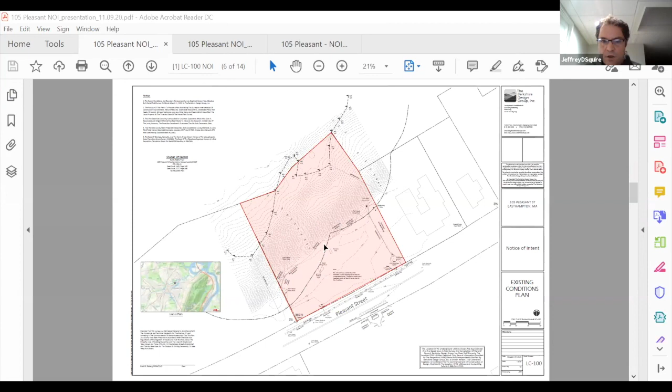again, just zooming in on the site, the upper portion of the site, you can really see the developed portion is all the level portion up here. The site drops off fairly precipitously to the back, to the edge of the bordering vegetated wetland in the back of the site. The extent of what used to be there really does follow the top of the hill.

The proposal is to redevelop the site with roughly a 3,700 square foot single story billiards hall. So that would occupy the western portion of the site. The eastern portion of the site, we've got a small parking lot. There's a stormwater system. We have a rain garden out in front, some other landscape elements.

Sidewalks. There's the rear deck that would be cantilevered slightly over that slope, but really the remainder of the site would remain untouched. We do have a single stormwater outlet in the buffer zone associated with a parking lot discharge, but we have a level spreader and a single 10-inch pipe that does go down the hill to discharge that system there. But the remainder of the site to the north will remain undisturbed, and much in its current condition.

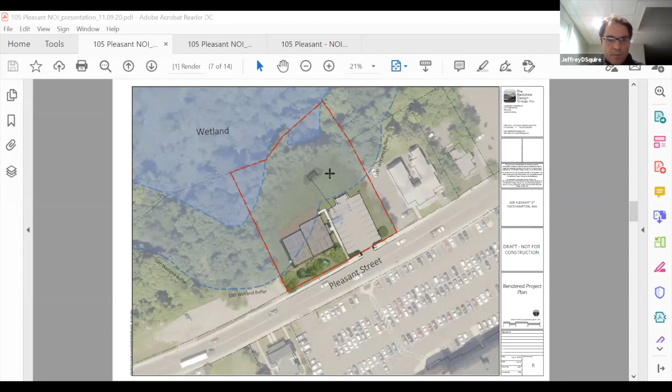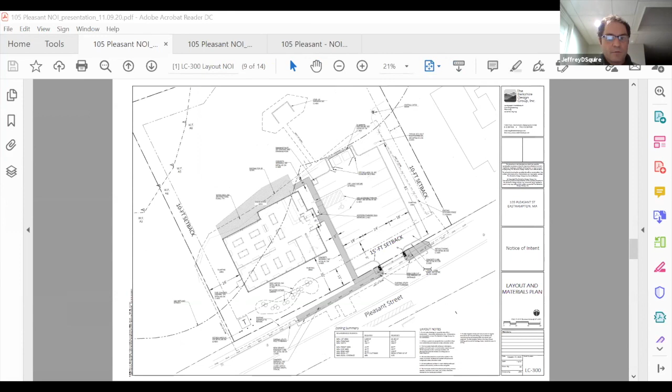Again, just walking through the plan set, we have a site demolition and erosion control plan showing how we intend to both construct the site, prevent sediment and erosion during construction, and then following construction. Basic layout plans showing the site, stormwater drainage plans. Again, we've got a rain garden out front to capture what we can out in front.

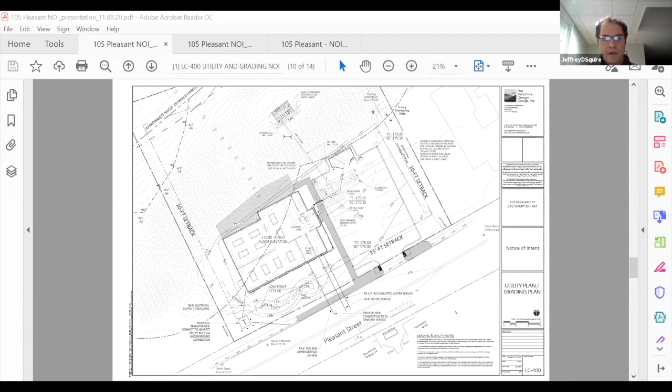There's a small infiltration system in the northern part of the parking lot. Again, with an overflow, there's a treatment chamber in the corner with a 10-inch stormwater discharge down the slope to this little bit of a level area, this little terrace in that slope that we're taking advantage of, so we don't need to cut all the way down the slope in the back for the discharge.

Planting plan, again, rain garden details. And I think the remainder of the set is just largely construction details. Stormwater system, treatment chamber. I can go through some of the comments from DEP or answer any questions that anybody has right now, if there are any. I don't know the best way to.

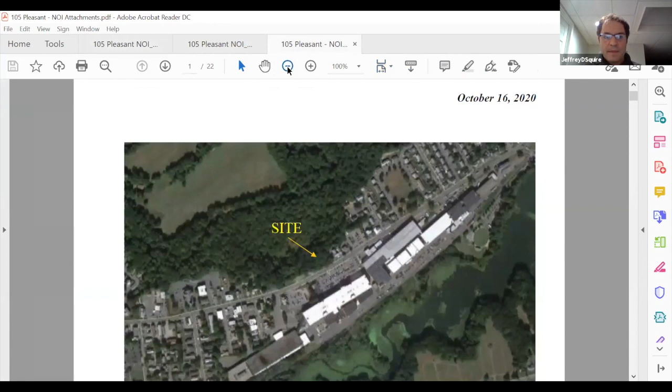So why don't you start by reviewing DEP's comments, and then we can open it up to further comments and discussion from the commission. Sure. Okay, great. So yeah, in response to the comments that we received from DEP, first one was about the underground stormwater chambers are subject to the underground injection program. We understand that. It's paperwork that we will fill out when the project is ready to be constructed in compliance with that requirement.

Stormwater zone 2, the public water supply discharge, stormwater standard 6. We did acknowledge this. At least our understanding is that specific treatment chamber, I believe I have some documentation as to how it meets the standards for that particular requirement. But again, we can review that in further detail if there's other questions. I do have some documentation in the back of this to help support that.

Illicit discharge compliance. Yes, we understand that. There was a statement of compliance in the stormwater report. I'll highlight that shortly. Manufacturer's data for the treatment chamber, again, that is provided further down in these documents, along with this comment regarding the zone 2.

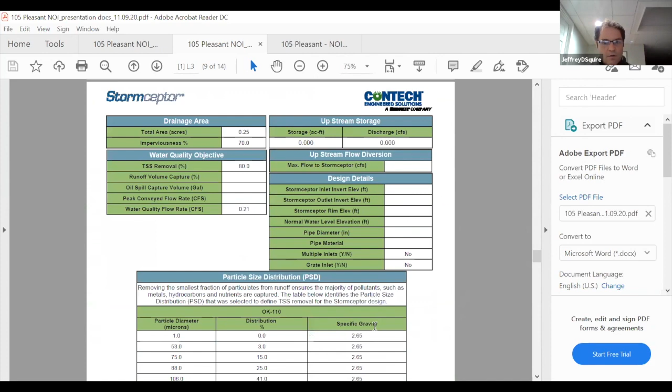The Stormceptor: this is all of the calculations and information from the manufacturer regarding the compliance with the stormwater regulations. I'm not the civil engineer, so I can't answer all the specifics of these, but we can provide this to the commission, and it provides a lot of the information that was, at least to my understanding, requested in those comments.

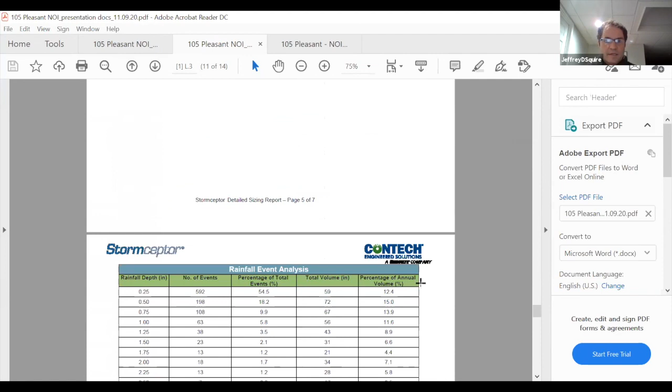And lastly, again, understanding the requirements of the guidelines for the level spreader. We did design the spreader in compliance with the Mass Highway design guidelines, which set a standard of 1.5 feet per second for velocity discharge, and we're below 1 in the 100-year storm. So we did review those guidelines. So yeah, real quickly, that's what I've got. I'm happy to answer any other questions.

Okay. Cassie, has the city engineer received a copy of the stormwater report, and have they offered any feedback on this? I haven't gotten any feedback from the city engineer yet. I don't know if that will be part of the planning board review as well, but I can definitely send that along and get his review. Okay, I'd like to verify that in particular. Mm-hmm.

All right, does anyone want to have any comments to start, or shall I start with mine? Rock, paper, scissors. All right then.

What is drainage on the site currently, just so we can understand? Does it go out to the street or just run off the back of the lot, or how does that work? It's a good question. I think there is a partial curb still at the back of the site. Looking at the topography, it really is generally pretty flat up there with a couple of small, isolated low spots, but we didn't pick up any catch basins. So I suspect there's a portion of the site that runs directly to Pleasant Street.

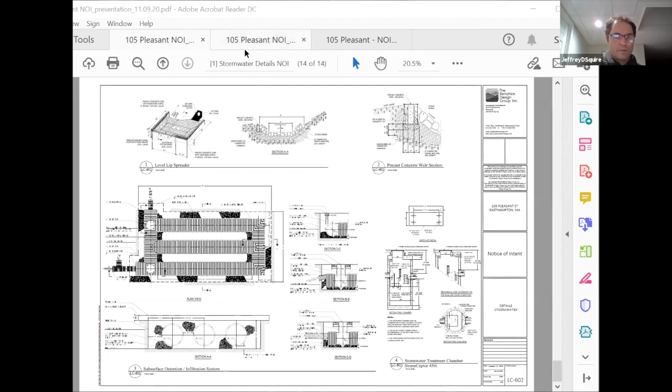So then they're going to excavate out how large an area? It's what, 10 by 10? 15 by 10? And how are they going to load all that soil out? Are they going to schlep it up the slope in buckets? Well, we'll need to work with a contractor to understand how they'll do that. Yeah, I imagine they'll have to pull it out somehow. Yeah, they're not going to be able to leave it there, obviously. Right.

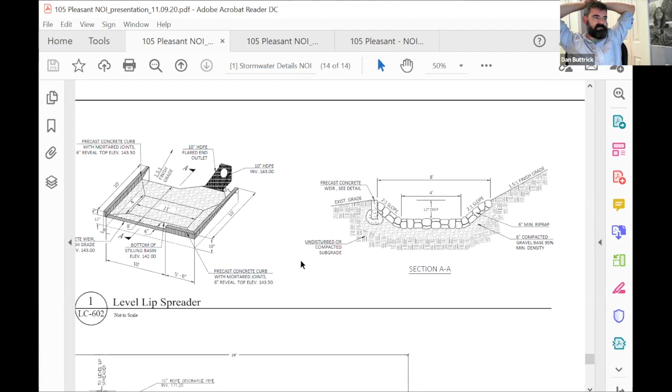I guess I'm thinking, moving towards an order of conditions, we could have some kind of condition to have more detail provided once a contractor is selected and construction started as to what kind of, if any, access improvements are needed. But the permit wouldn't cover that. So we'd have to address that after the fact if their footprint of work is going to be bigger than what we approve. That's where I'm thinking. I'm just looking at the slope. I feel like half the work is going to be very challenging. Yeah. Okay.

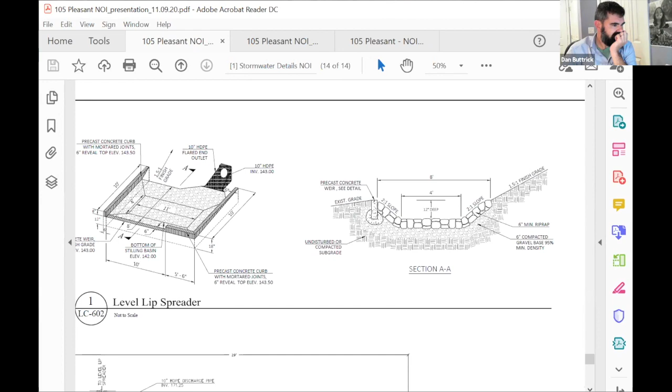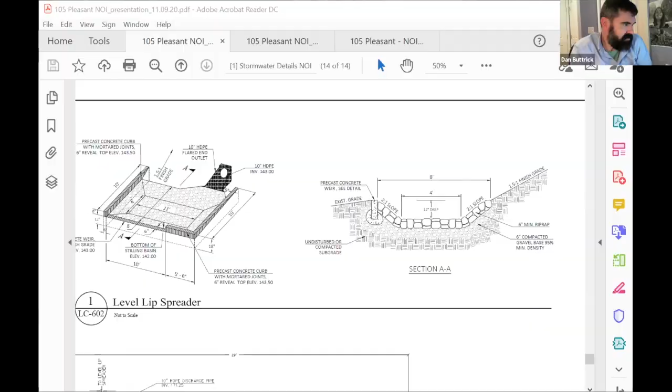So looking at this, where does the pipe come into the level spreader? It doesn't show in that section. Well, in section AA it doesn't show. It's shown in the ISO drawing, but it would come in roughly through this embankment here. I'm no longer seeing the plans. Oh, I'm sorry. Did I stop sharing? I'm following along in the version on the OneDrive. So yeah, it would come in right through here somewhere, if people can see that. So then on the down gradient side is the precast concrete weir. Yes, correct. So they're going to.

So can you go over the detail of that? Sure. Yeah, so it's surrounded with precast concrete to help contain everything and define it and provide that level lip that you're really trying to achieve with the spreader. There's a notch in it to allow the lower flows at this elevation, but the inside is really intended to dissipate and spread that water out, obviously.

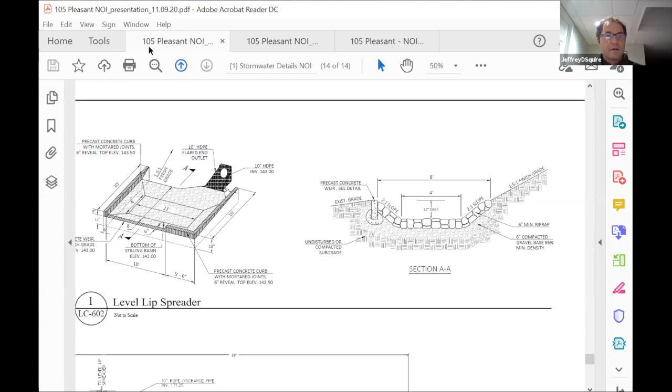Okay. So, are there any? I didn't notice any, and it could just be that I didn't take a good look. Are there any details on the restoration of the slope? Not specifically. Like I said, the slope itself right now really doesn't have much there aside from a handful of trees. So there's nothing specific in the plans that speaks to what that would be revegetated with. But you made reference to some sort of erosion control blanket, I believe. I would imagine they would need to put down some sort of erosion control blanket once they fill that trench. Yes.

And we're not dealing with riverfront area here, right? We're just in 100-foot buffer zone. This is just buffer zone, correct? Jeff, I don't know how other members of the commission feel about this, so I'm seeking their input too. But I think given the steepness of that slope, I would like to see a detail added regarding the restoration of the surface with an erosion control blanket and what native seed mix would be proposed. Mm-hmm.

Yeah, I think that makes sense. I think it's just too long a run and too steep a slope to leave to question. Mm-hmm. What is the change in impervious area compared to existing conditions? That is a good question. I know it's a reduction. I don't know how much of a reduction though. It's a reduction in impervious area? It is. Yeah, let me show you.

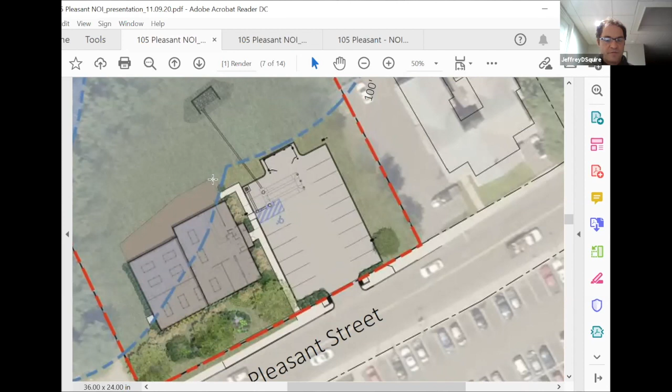Yeah, if you look at the existing site. So the existing site basically has asphalt below this upper portion from essentially this corner. You can see it wraps around here. You can see the edge of the guardrail. There's old curbing on this back edge here that wraps around and used to tie in evidently to the gravel lot next door. That's what's there now. And so we're providing some green space on the eastern portion of the site out in front of the building, and then again on the west side. And the top of slope is roughly right here. Mm-hmm.

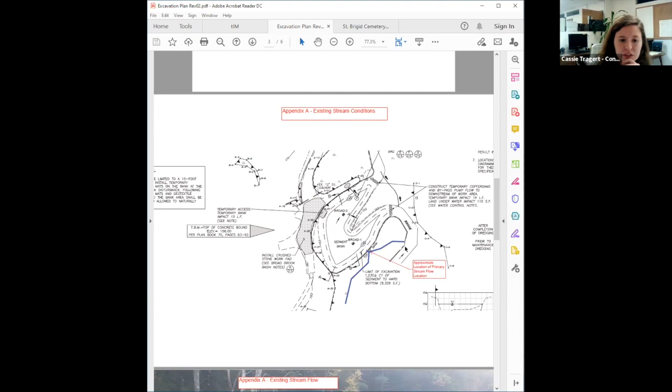Do we have a picture here that shows the original plan as well? Yeah, here, let me scroll up. So let's see. I believe this is the original plan that I'm displaying right now. It's labeled as existing. They added this to show that there's more flow happening. But the original cofferdam was supposed to be here.

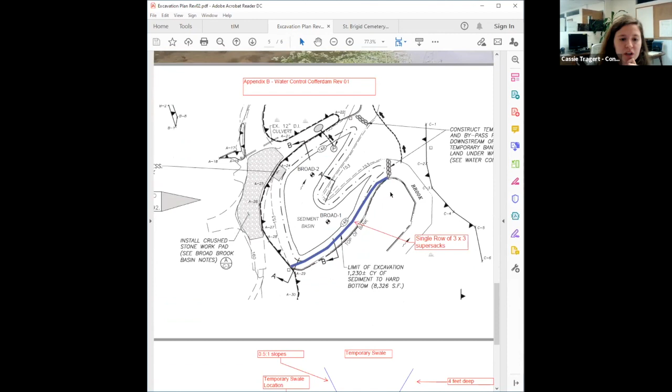Then they had another revision. This is just showing existing. Then they were going to put in the super sacks here to make sure everything was directed to that original cofferdam plan. Those are the ones that failed. And then this is a new plan. Do you want me to stay on any of these?

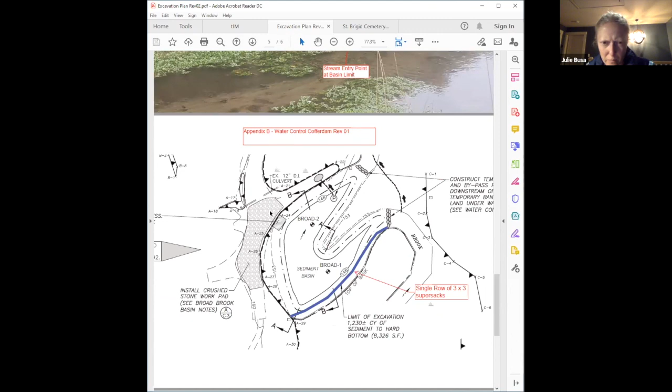So where is the additional water coming in that's causing the problem? It looks like right here, approximate location of stream flow, right? So right around here. And there's 2 photos as well. There should be 2 photos attached to that as well. Yeah, I had one photo of the existing conditions. Let me just scroll up to those again. Yeah, I only had one photo in there. Oh, okay. So yeah, I guess they merge here.

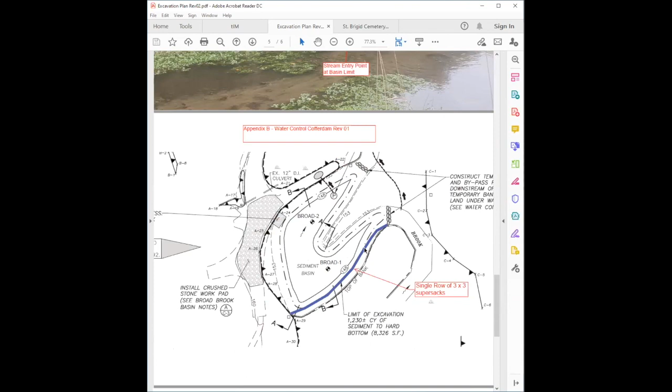What happened was the original stream somehow must have got clogged at one point, and the water is still coming through the original stream as shown in the drawings, but the flow is not 100% within that stream. So somehow there must have been a breach, and now instead of coming more on the northern side of the detention basin, it's now coming more on the southeast side

in the wetlands area. And what's happening is when we install the super sacks within our limits of excavation, we're installing them on top of the existing soil, and that soil is sediment. Because the sediment has no structural integrity, the water is coming in with a pretty good current, and it's just undermining the super sacks that we placed, which was our Alt 1 plan. So it wasn't eroding around the sides of them so much as it was eroding underneath. Correct. I see.

Because when we installed them on Tuesday, it worked fine. When we showed up the next day, it was undermined. Mm-hmm. Cassie, is there a photo that you can scroll to that shows where this temporary swale with check dams is proposed? Yeah, hold on. Let me see what I've got from the past site visits.

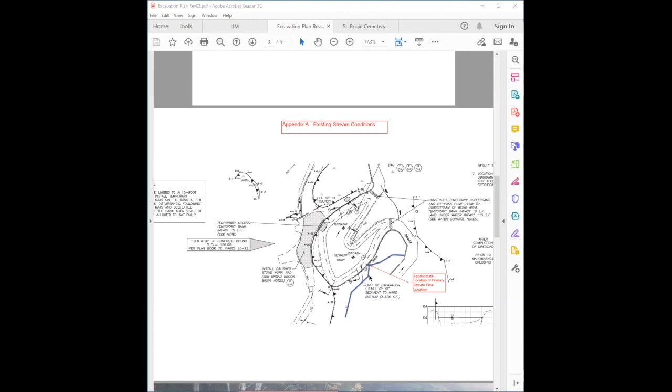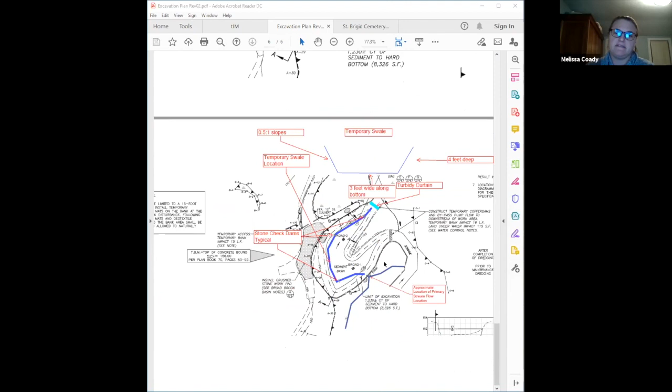No. So if that's the original swale or channel, that original channel probably has maybe 5 or 6 inches of water flow. The breach is probably about 2 to 3 feet of water flow. I see. So the majority of the water is going through the breach. So there's been a significant change in field conditions since this was put on paper the first time. The water is coming in from a different location. Yeah, the majority of the water is now coming in from a different location.

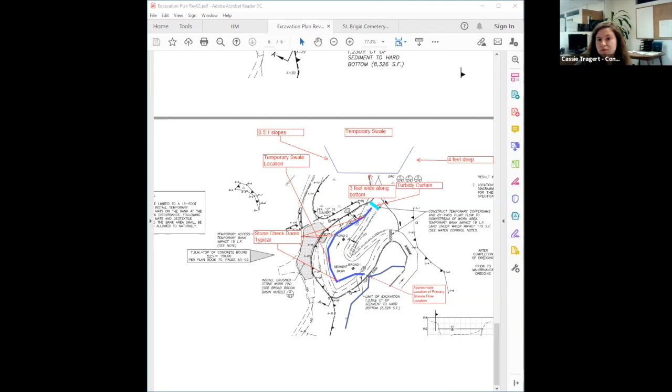Cassie, when were you out there? The last site visit was on September 2nd. Paulo, have conditions changed or gotten worse since that site visit? Well, no, the photos that I got you.

So we mobilized October 5th, and it took us 2 weeks to do the first one. So October 19th or so is when we started working on the Broad Brook, and then we've been demobilized for 2 weeks. So 2 weeks ago is when I took that photo and attached it to that work plan.

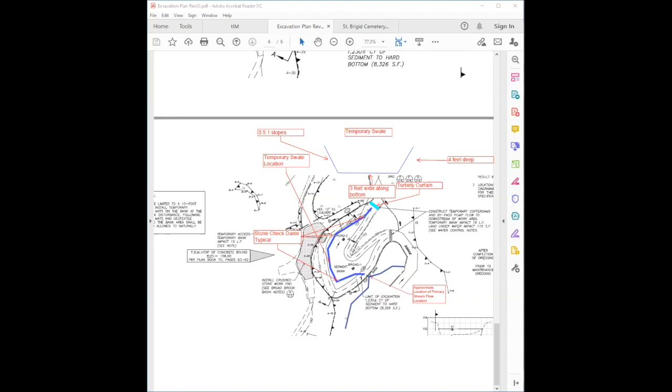And 2 weeks ago is also when we tried to do the cofferdam, which is cofferdam Alt 1, along that southeast side of the basin. We attempted that on Monday, got it installed on Tuesday, and then when we showed up on Wednesday, it washed out. And at that point, that's when we said we had to stop and come up with something else. To answer your question, that's from 2 weeks ago.

And we were going to do 2 pre-construction meetings because we did one for the other. Yeah, exactly. And so we were waiting to do the site visit for this one once it was realized that the conditions have changed. Correct. Originally, we were supposed to get the cofferdams installed and the bypass pumping installed. At that point, we were going to set up the meeting. We never got to that point.

What would your sequence of construction be for putting in that swale for the channel? Downstream to upstream? It'll be downstream to upstream, yes. So the way the water's coming in right now to breach, we could potentially put a couple of super sacks because we still have them on site, and I still got an extra load there because it's ordered. I could potentially put a few across where the water's breaching.

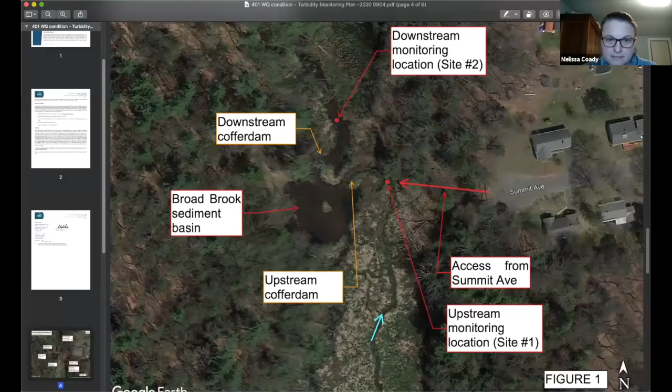So this is the Broad Brook Basin here. The photos that Cassie was showing earlier were taken from approximately this location where my cursor is. The stream channel shown in this blue arrow, as shown on the plans, kind of wrapped around and then comes into the basin. And then this is approximately where that breach is that Paulo was talking about. And so the two red dots are where the turbidity monitoring is taking place.

Yeah, so my thought on the matter is that it seems like a reasonable way to solve this construction related issue that's happening, and it sounds like it doesn't increase the impacts to the project. But the concern just becomes, you know, a tiny little sprinkle of sediment makes a big turbidity problem that leads to complaints, even if it has essentially zero impact.

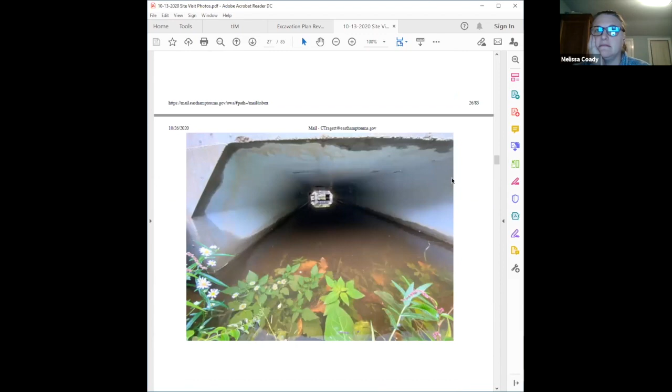I think we flat out said at their previous meetings they've attended that they have to get 2 years of monitoring and documenting success of the replication areas before they can consider requesting a certificate of compliance. Right.

This is the second crossing. And I think this is probably how it was meant to be, but the old crossing was left in place. So there's this sort of awkward gap between them. Does anyone remember if this is? No, I remember a replacement crossing.

They did a replacement crossing at, I think that might even be outside of their property, because they did 2 replacement crossings, but at this one crossing, I remember discussing this with him, being like, oh yeah, that's outside of our, we can't touch that culvert. But there was always, yeah. It was outside the limit of work, I believe. Mm-hmm. I think, yeah, that's what he said on the visit.

I would be concerned as the owner of the new structure that it's going to be undermined by the scour that's likely to occur in that space, but that's just me. I mean, there's not ever going to be a lot of flow velocity through here, but.

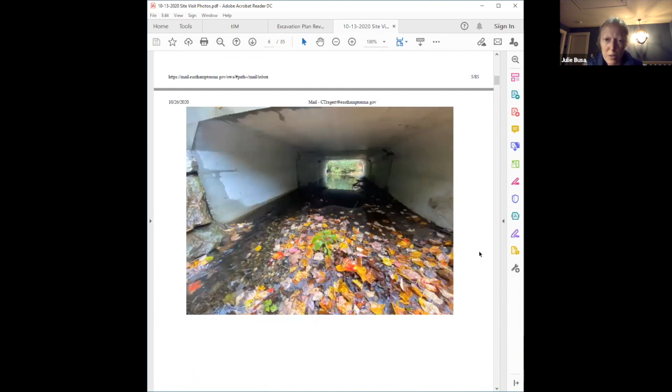Well, in the one on the far edge, the long linear one on the north side, maybe it was at least 4 or 5 inches deep, maybe more. Some of the other ones, it was probably 2 or 3 inches. It seemed like a lot of water everywhere, you know, for the amount of rain that we had. Okay.

So are we thinking? Oh no, go ahead. Sorry. I was just going to say, thinking ahead and thinking of other sites in Easthampton, there is an obligation that the stormwater basins function. And if they don't function, then we as a commission should not be issuing certificates of compliance for that, and we should be requiring corrective actions, even if it means they have to remobilize to the site or present design modifications for those corrective actions and then implement them. Yeah, that's why we have the bond. Right.

Well, we should see what it's like after it's not rained in 5 days, and if Cassie gets out there tomorrow. It's gonna be a narrow window, Jay. I think I can work it out. Gotta get up early and get out there. Dry within 48 hours. So she shouldn't have to wait 5 days. True. I'm just thinking the gap between forecasted rain events is tight. Right. So are we wanting to see if they successfully drain within 48 hours? Do you want me to wait till after it rains and then go 48 hours after that?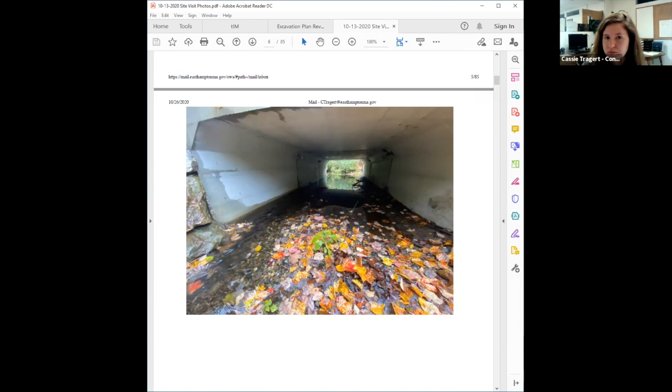I'd rather have you go twice. Okay. I'd rather have you see it before it rains. Because if they're holding water, that's a problem because it pretty much hasn't rained in over a week, if I'm remembering correctly. So if there's any standing water when you get out there, that's cause for concern. Okay. All right, cool. I can definitely do that. All right, is there anything else about this, or are we ready to go to the next one? Move on.

The next one is River Valley Co-op. They had a request for administrative approval for a change for the location of the batteries. Is it within the limit of work? Yes. Okay. Does anyone want to discuss this further? No. Motion to grant administrative approval for change in location of batteries within the previously approved limit of work. Is there a second? Second. All those in favor? August, aye. Ryan, aye. Harwood, aye. Buttrick, aye. Busa, aye. Whittemore. Motion carries. Thank you.

Okay, cool. I didn't have any other project updates. Is there anything else anyone wants to know or any questions, comments, concerns? I would like to say, can you please follow up regarding the 298 and 300 Loudville Road site?

As we're rounding out the growing season, something that required things growing is of concern. Okay. So specifically, what's up with the growing of the plants? The status, did they complete those other modifications? Right. Okay. Yeah, yep. I haven't heard from them yet, so I'll reach out.